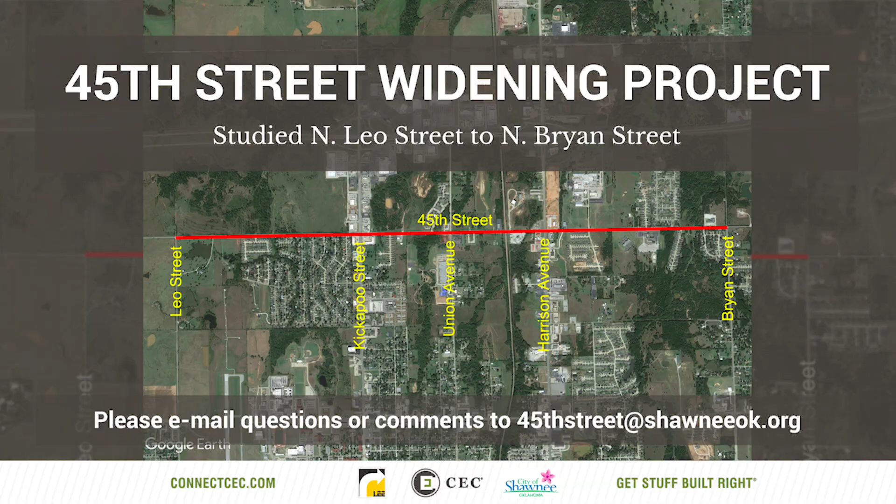I'm going to start this presentation off by providing you a little bit of background on who CEC is. So CEC is a multidiscipline engineering firm that is headquartered out of Oklahoma City. We are the largest Oklahoma-based engineering firm with 4 offices, 3 of those being in Oklahoma and then 1 office in Texas. We currently have around 210 employees and we continue to grow.

I would like to introduce you to our project team. As I mentioned earlier, I am Erica Jones. I am the project manager for the project. We also have a balance of experienced team members, as you can see, and we have also teamed with Lee Engineering, led by Esther Shaw Smith and Erica Myers, to complete the traffic analysis and design.

Some of the main goals for the project that were established as we began working on the design concepts were to, 1, improve the aging infrastructure. There are several locations along the corridor where the pavement is deteriorating with the presence of asphalt cracking, patching, and rutting. There are also some sections of the roadway that are currently in fair condition, but are nearing the end of their current life cycle for the asphalt pavement.

We are also looking to improve the traffic capacity along the 45th Street corridor for both current and future conditions. Improvements to pedestrian and cyclist safety is also a key component of the design, as the existing sidewalk is sporadic and it does not provide a continuous path for pedestrians and cyclists. We are also looking to provide improvements to drainage and have completed an analysis of the existing drainage culverts to determine if they are sufficient for the amount of water that flows along 45th Street.

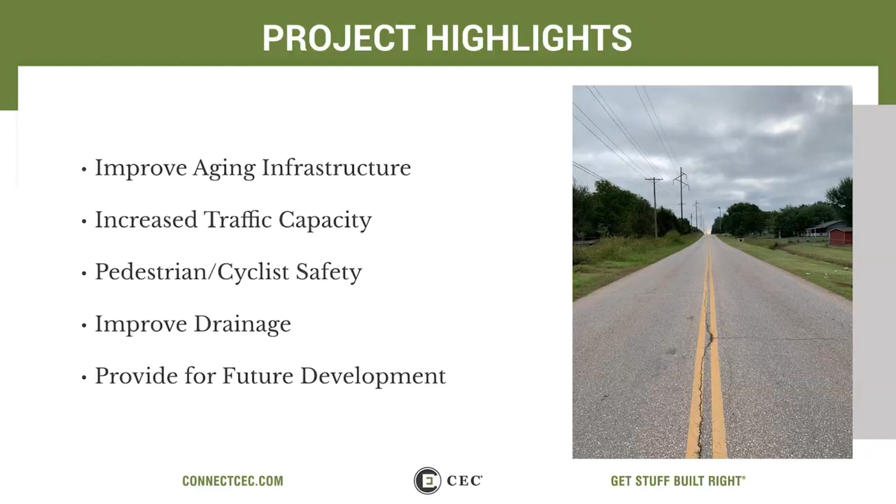And lastly, we wanted to ensure that as the City of Shawnee continues to grow and new developments are established along 45th Street, that the roadway and traffic improvements were designed to handle that anticipated growth.

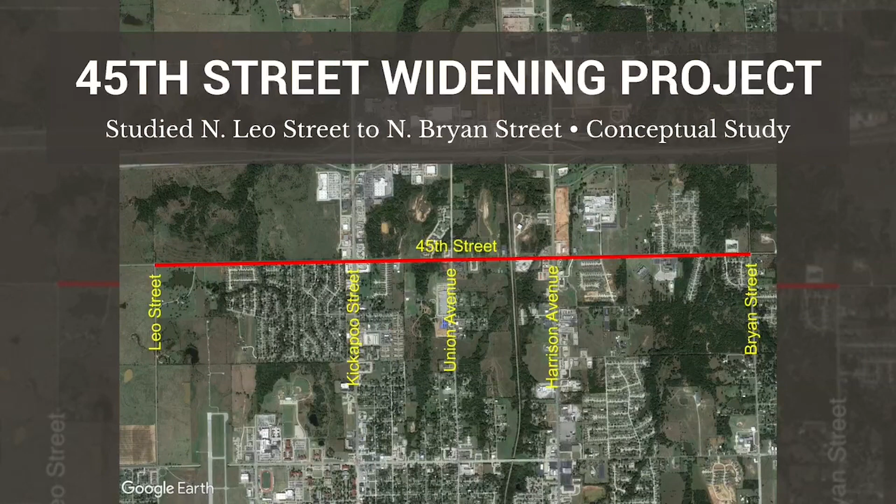As I mentioned previously, the initial study and analysis was conducted along 45th Street from Leo Street to Bryan Street. But the construction project will actually be broken into 2 separate phases. So phase 1 will run from Leo Street to approximately halfway between Kickapoo Street and Union Avenue. Then phase 2 will be constructed at a future date and will start where phase 1 stopped and then extend to the east to the intersection with Bryan Street.

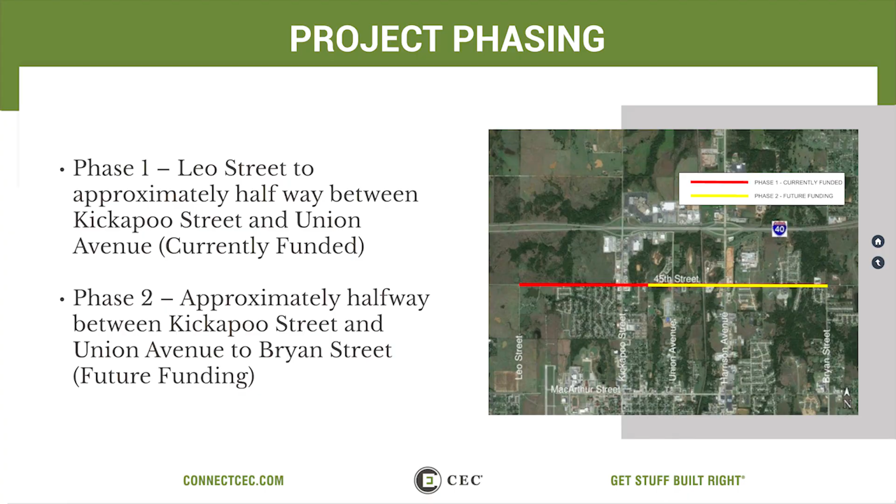I am Erica Myers with Lee Engineering, and we performed the traffic study for the 45th Street corridor. We collected traffic counts in March of 2021 and analyzed them to determine how the corridor was operating today. The analysis software reports the results in terms of levels of service. Level of service A represents free flow conditions with very low to no delays.

Once you approach level of service D, congestion becomes noticeable, delays increase, and many vehicles have to stop at red signals, but the intersection is still functional. Level of service E represents heavy traffic flow, long delays, and the intersection is operating near capacity. Level of service F represents extremely unstable traffic flow, heavy congestion, and stop-and-go conditions.

Currently, the portion of 45th Street to the west of Kickapoo is functioning well with free flow conditions. The intersection of Kickapoo is operating at level of service D overall, which means it is still functioning, but the westbound approach is nearing capacity during peak periods.

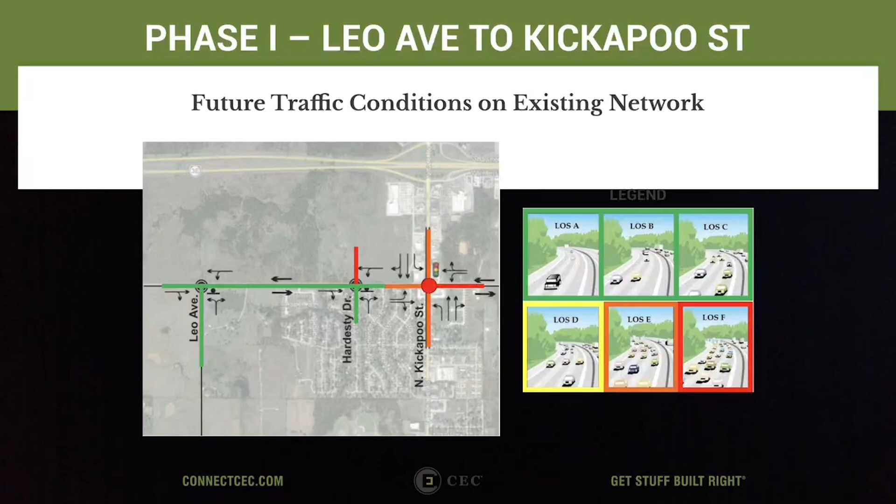We forecasted traffic volumes out over the next 10 years and performed a future analysis to predict how the corridor would operate without any improvements. With the addition of the new elementary school and the other mixed-use developments between Hardesty and Kickapoo, we predicted the new southbound approach on Hardesty that would serve the new developments would operate at level of service F. We also predicted the intersection at Kickapoo would degrade to a level of service F, with all approaches operating at level of service E except for the westbound approach, which would be at an F.

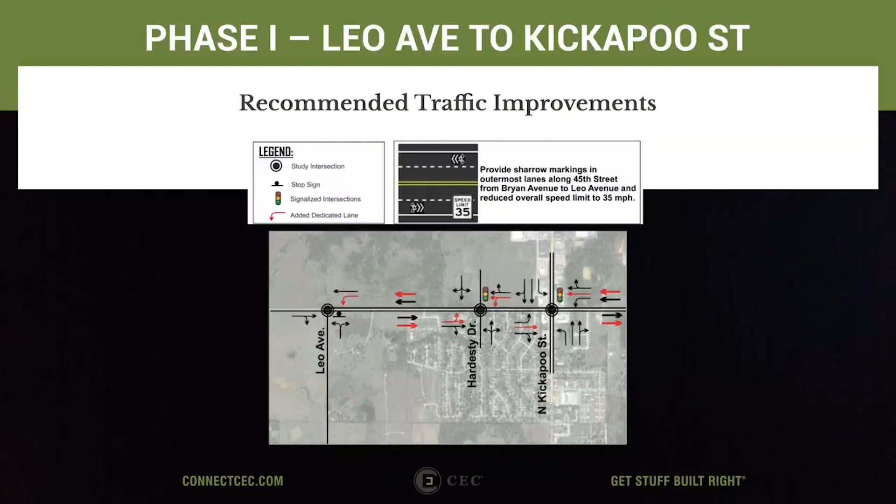To mitigate these degraded levels of service, we recommended 45th Street be widened to provide an additional travel lane in each direction. A traffic signal is recommended at Hardesty once the north leg is constructed. And finally, the traffic signal timing at Kickapoo should be updated with a coordinated timing plan to improve operations at the intersection.

Based on the traffic analysis that was conducted and the future developments that are planned within the project area, we are recommending that the roadway along 45th Street be widened from a 2-lane to a 4-lane roadway in order to alleviate some of the existing congestion that is currently happening along the roadway, and also to provide additional capacity for the increase in traffic volumes that are anticipated with future developments.

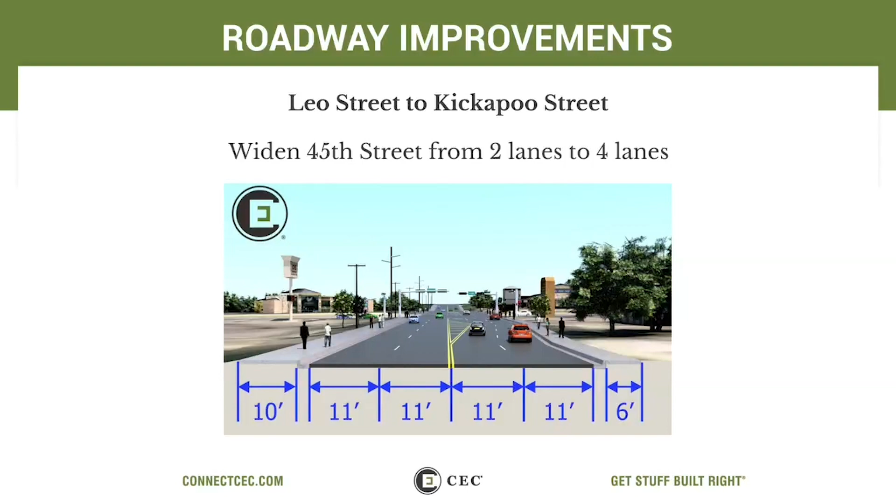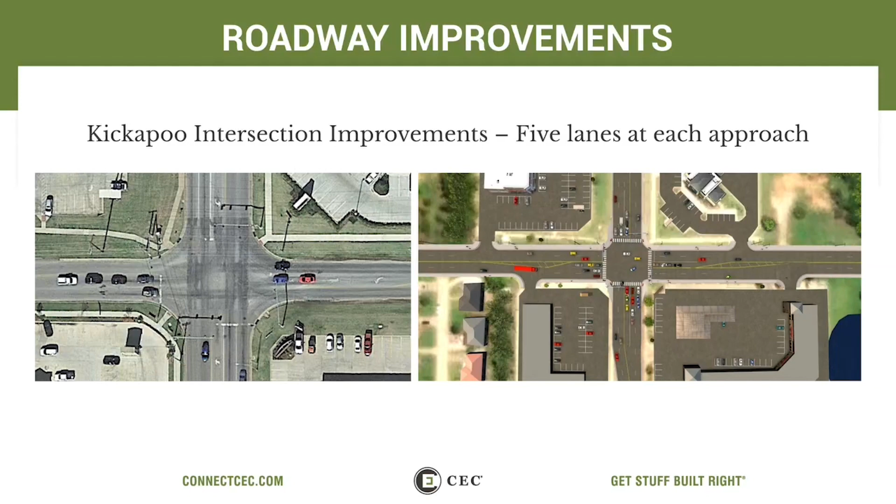The design will also include improvements at the intersection of Kickapoo Street and 45th Street. We will be providing 5-lane approaches in each direction, improvements to the traffic signals, and also adjustments to the pedestrian access at the intersection in order to improve safety.

In order to improve pedestrian and cyclist safety along the corridor, a 10-foot wide multi-purpose trail is proposed along one side of 45th Street, and a 6-foot wide sidewalk is proposed along the other side of the roadway. The trail will run along the north side of the roadway from Leo to Kickapoo, and then will cross to the south side of the roadway from Kickapoo to the end of the project extents, with a sidewalk running on the opposite side of the roadway as the trail.

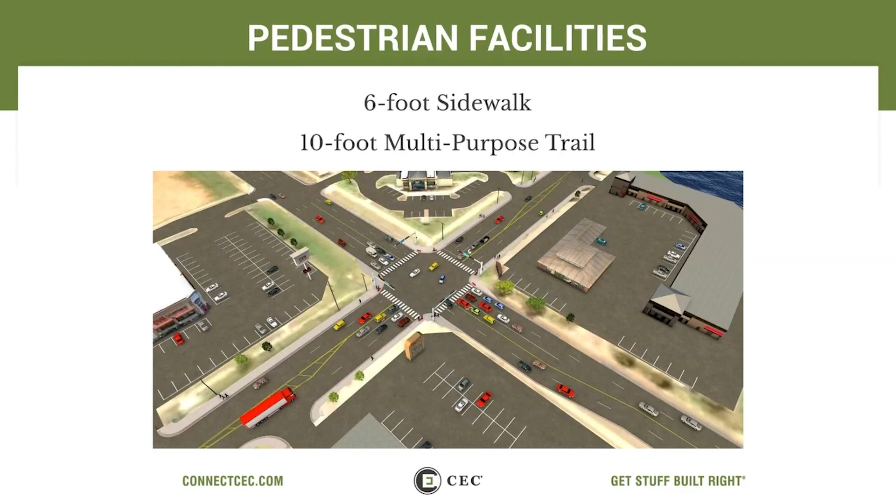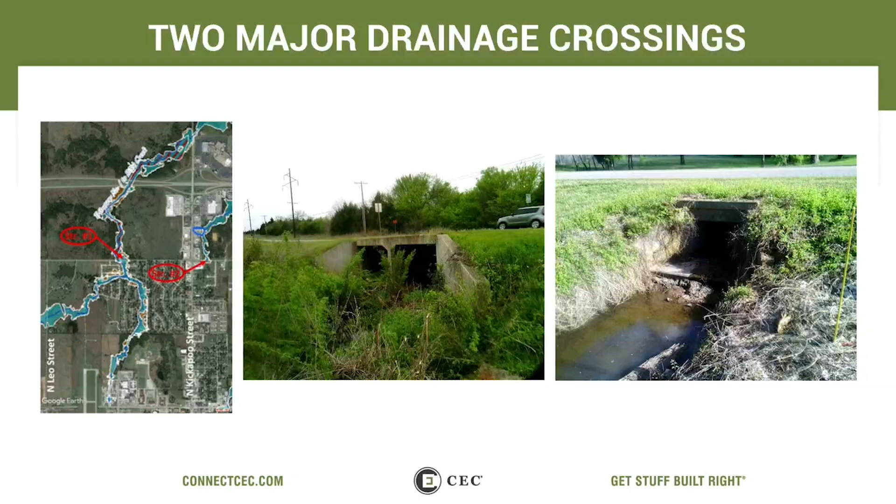There are 2 major drainage crossings within the project extents. The first crossing is an existing double cell reinforced concrete box that is located approximately halfway between Leo Street and Kickapoo Street. Based on our drainage analysis of this crossing, the existing box will need to be replaced with a larger triple cell structure and be lengthened to accommodate the roadway widening. The second drainage crossing is an existing single-cell reinforced concrete box that is located just to the east of Kickapoo Street along 45th. Structurally, this box is in poor condition and will need to be replaced as part of the project.

Another key aspect of the proposed design would be to incorporate a proposed storm sewer system to handle the stormwater drainage along 45th Street. Currently, the 45th Street corridor's drainage is handled by open ditches along the roadway. The proposed storm sewer system will remove the ditches and place the drainage underground. Additionally, a curb and gutter will be constructed along the proposed roadway, which will help with stormwater runoff and also minimize impacts to existing utilities and reduce right-of-way needs along the corridor.

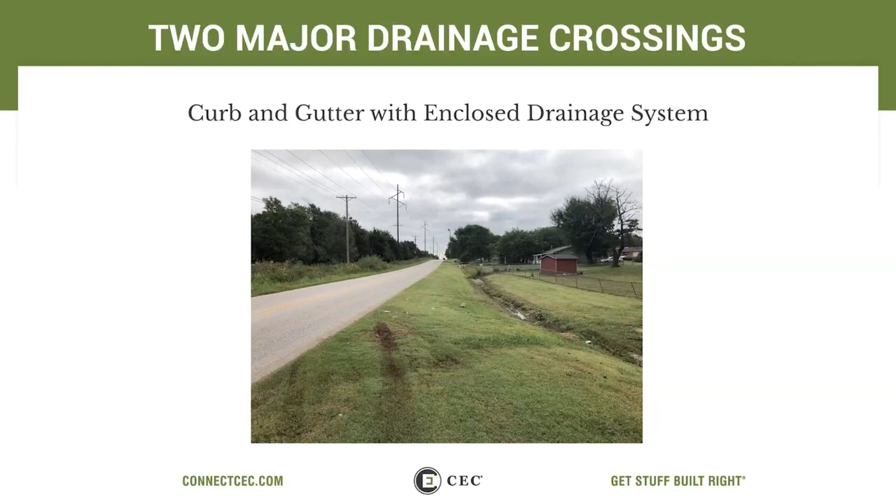So now that we have given you all of this information, what is the next step? Where do we go from here? This presentation is considered the public meeting, and based on the input and comments from this meeting, we will make adjustments to the conceptual design and move forward with the design plans for the project. We're anticipating that the final construction plans would be ready by the end of 2022, with construction projected to start in 2023.